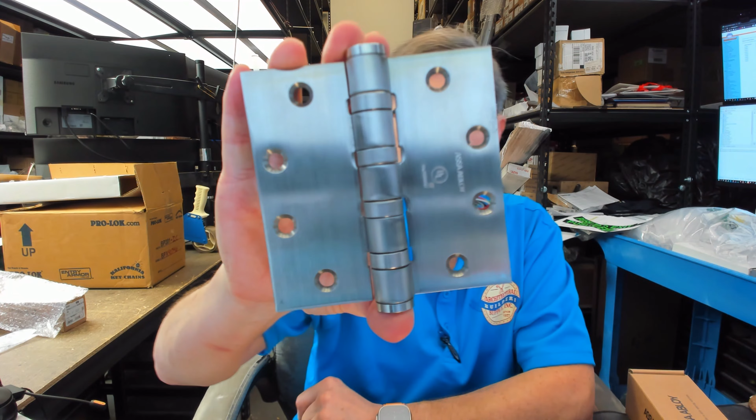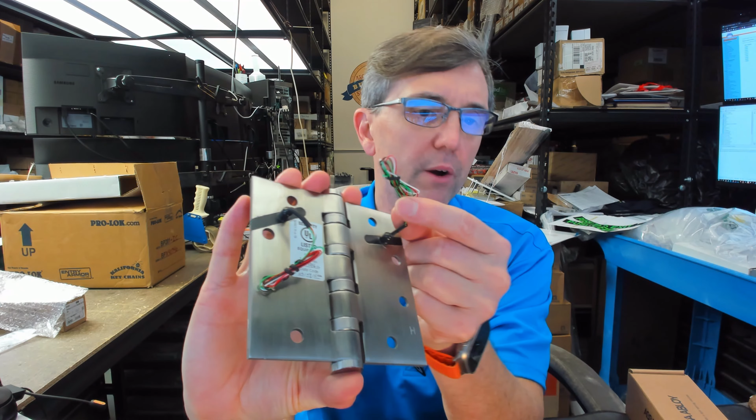Looks like a typical hinge, that's for sure. T4A3386, except this is a CC4. So this is a 4-wire hinge. CC would just give you bare wires on the back, and that's what this is. If you ordered a QC, it would have a quick connect, which works in the rest of the ASSA ABLOY QC ecosystem, whether it be exit devices, obviously, that you're going to connect to. You're going to be able to have a connector and run that wire back up to access control, your power supply, etc.

Bare wires are one thing, not really a big deal, but the QC is most commonly where I see new projects specified. They want the connectors already attached. Exit device goes on, connector, wires coming out of that with a connector to the connector on the hinge, obviously connector to the auxiliary cable going up to the power supply or whatever it might be, other components, other loads and switches.

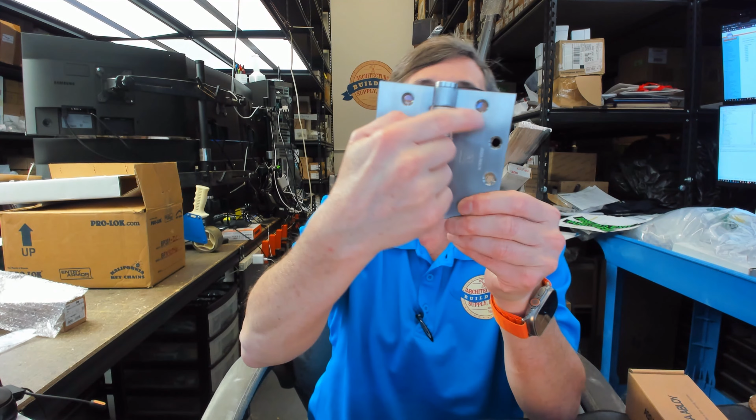CC4 is how this was specified. What's happening on this opening, I think it's just electric latch retraction. So it's just power is all that is on the opening where this hinge is going to. Looks like McKinney has an interesting way of machining the back side of the hinge to get those wires in there. Hinges like this are completely non-serviceable. You can't drive the pin out because those wires are literally going through the hinge.

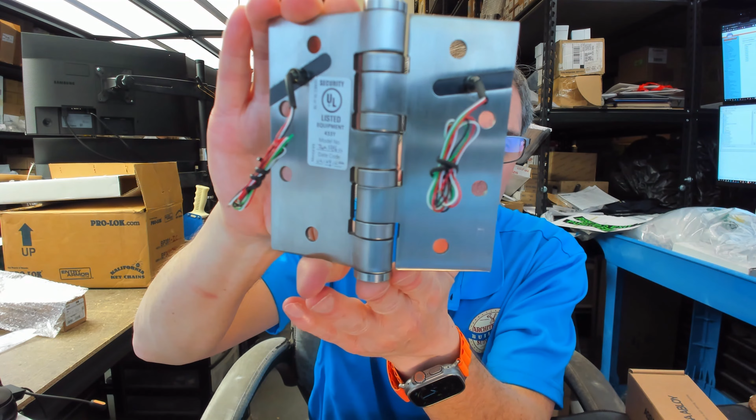In some way. It's not evident to me how that wiring is being done. Maybe up here, down here, and then here could be how that's done. That might be it. Very nice clean look on the hinge, that's for sure. A UL label on the back. It's also important to know that this hinge would be considered non-load bearing, so you would never put this in the top position of your installation. Let's see if we can get the camera to focus on that a little bit better. Okay. Anyway, there you go.

This is a T4A3386. Let's dissect that part number, but first it's a 4.5. That means that it is a 4.5-inch tall hinge and a 4.5-inch wide hinge. This is a T4A, which means that it is a heavyweight. And when we pull out the caliper, this should measure 0.180. My caliper tells me it's 0.176. Yeah, 176, and that's certainly within tolerance.

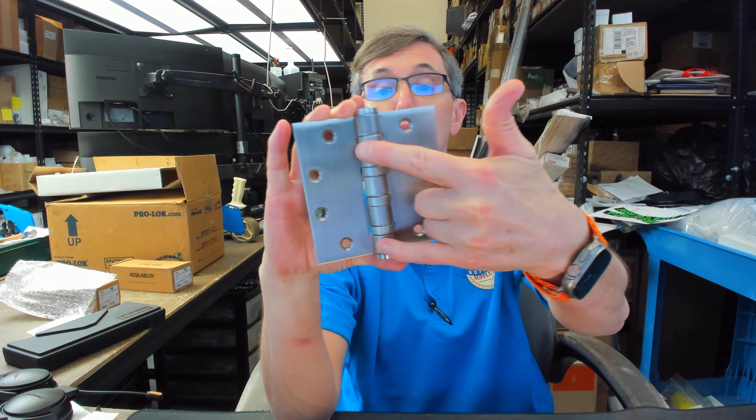This is a heavyweight hinge, and the tip-off immediately when you look at this is that it has 4 bearing packets, actually 4 oil impregnated packets. That 4 of them versus 2 means it's heavyweight. So where are you going to use this hinge? Let's talk about that right now.

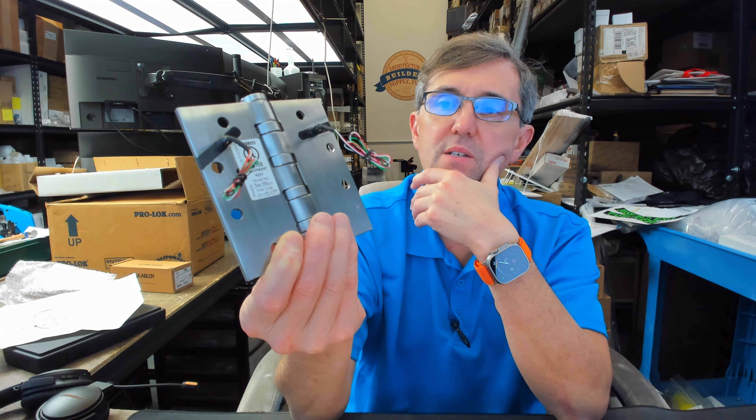So obviously some sort of requirement to permit low voltage current to pass from the securing area or some part of the door through the hinge back to access control, incoming power, things of that nature. So that's job one of this hinge. Why it's a T4A3386 is certainly because of the requirements of the mechanical portion of what's being done, not the electrified portion.

T4A3386 in no particular order means several things. It means it's a 5-knuckle hinge. You can see that. T4A means it's heavyweight. We talked about that earlier. 3386 means a couple of things. First of all, it's meant specifically for a square edge door and non-ferrous. So this is a 32D or a 630 finish. That means solid stainless steel with nothing other than a brushed finish.

So the fact that it's 4.5 by 4.5 tells me that it's likely an exterior door that is maybe heavier than standard, might be a 16 gauge door, and standard volume cycles over the door. And yes, you're doing some sort of access control on it. You might have the ability to unlock the exterior trim to be able to come in, that sort of thing.

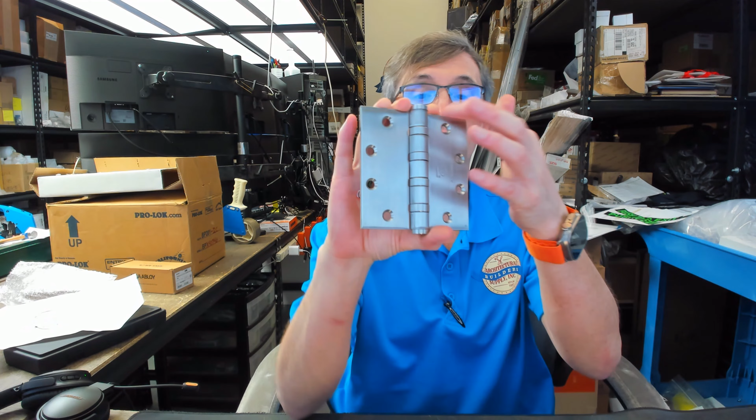So again, door thickness minus backset times 2 plus inset plus clearance. The last thing that you need to know is you always round up to the next widest hinge that's available. If the answer was just 3 1/16, which it was, this would be a 4.5 by 4, because 4 is the next available size, and that would be the right size. 4.5 by 4.5 may not have been the right size for this.

That's what was specified. It was brought to the architect's attention in the submittals that 4-inch would be a better choice. They elected to stick with 4.5 by 4.5. Okay, it's not best practice. You do want that vertical axis of pivoting brought as close to the face of the door as possible in all instances so that the function of the opening has been achieved, and you want to do that as elegantly as possible. This is going to include fasteners.

That's the TMS portion of the part number, but what's interesting is TMS means template machine screw. If we pulled up this industry standard document, we're going to find TMS. TMS is specifically going to mean template with machine screws.

So what that actually means is that you're going to take a machine screw and you're going to install it into a door and a frame that has been drilled and tapped for that. TMS means that you're going to literally go into tapped threaded holes.

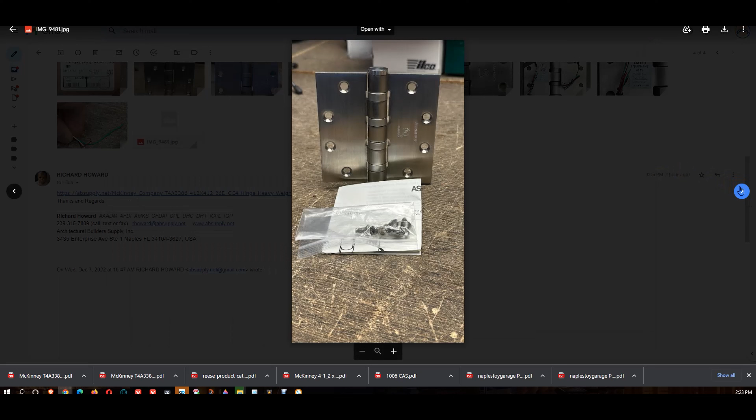Okay, here's the hinge that we are looking at. Let's take a look at some photographs that we have. There's the label, T4A3386, 4.5, 4.5, 32D or 630, CC4, TMS. The hinge itself. Nice and clean look on the front of it.

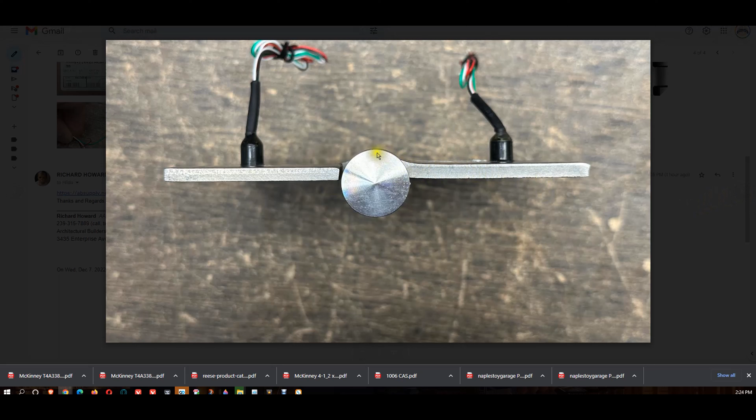This is a cross section that would show us what the swage or the bend on the hinge leaf looks like. That tells us that this is a full mortise hinge. Well, it tells us that it's a full mortise hinge for a square edge door, and I'll show you what that means in a moment. Close-up view of half of the hinge.

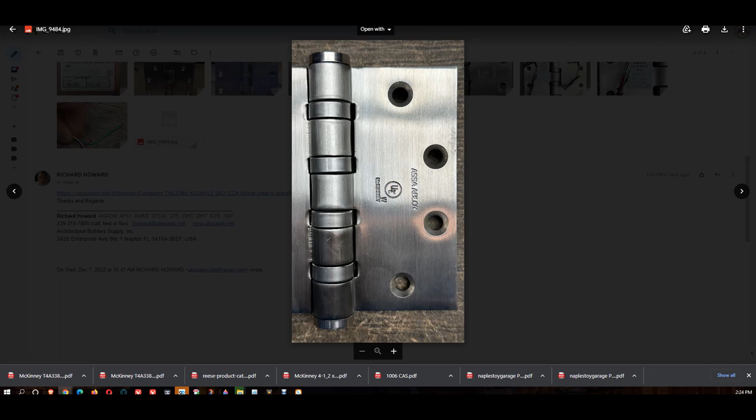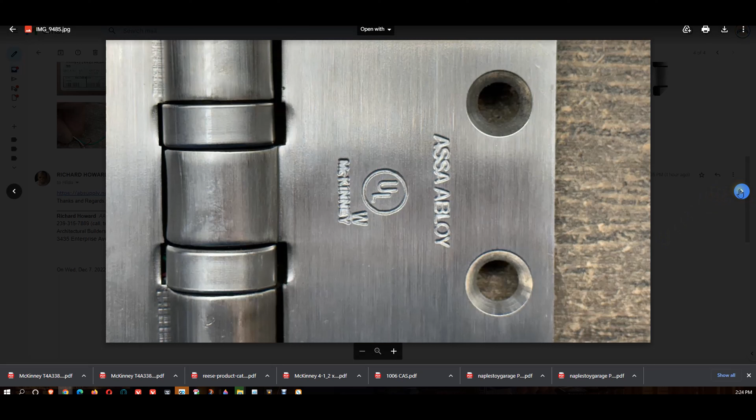That UL label is not mandatory on fire-rated doors to be on the hinge. All other hardware on a fire door needs to be labeled. Hinges don't have to be, as long as they're compliant. Non-ferrous base material and ball bearing. Close-up view of that finish and the manufacturer's logo. I don't know what the W means. Admittedly, that's a mystery. Currently.

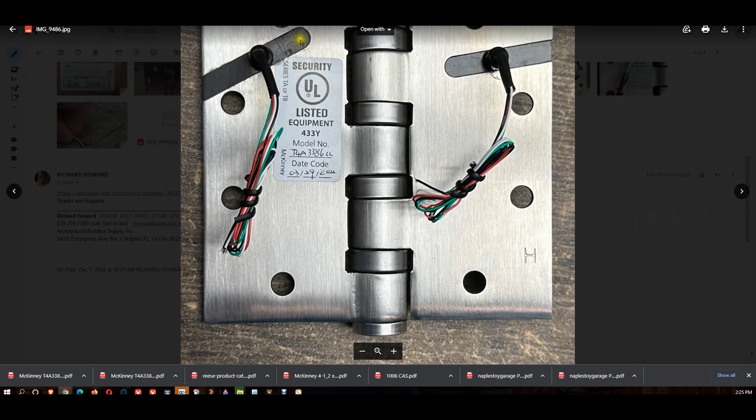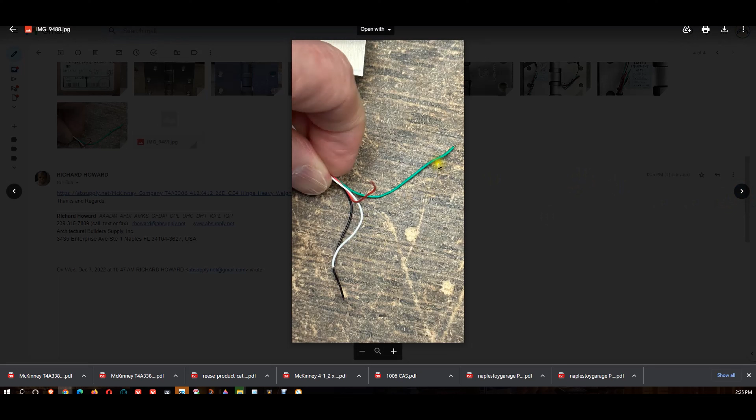The back side of the hinge. I would imagine some milling machine comes through and does that preparation after the fact. They may drill holes. I don't know. At some point I'll ask the factory how they race the wires through there. Showing half the leaf. Green, red, black, white, and green is what they've got here. Showing the 4 wires, those Torx machine screws along with the installation instructions.

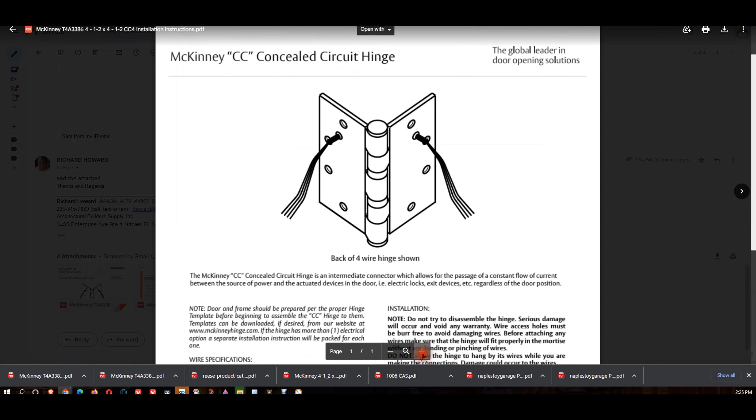Now, supporting documents. This document is actually included with the hardware. McKinney CC concealed circuit hinge. Just a power transfer hinge is what it is. It's a low voltage transfer hinge. There are air transfer hinges as well, when you need to have hardware that's not mechanical and is not electrical at all. There are applications that are in areas that can have no potential for voltage at all, and compressed air is used in those cases.

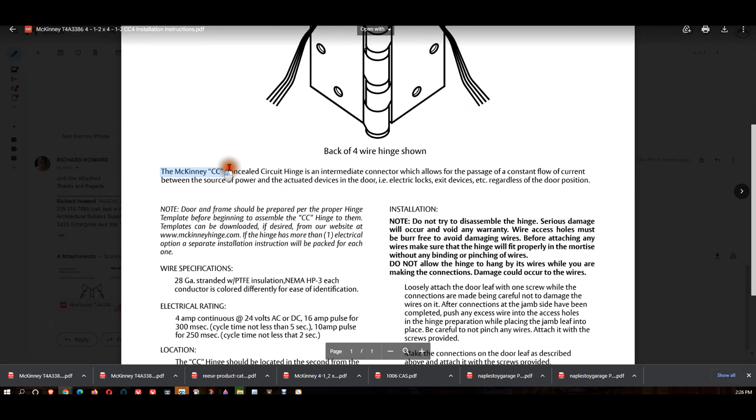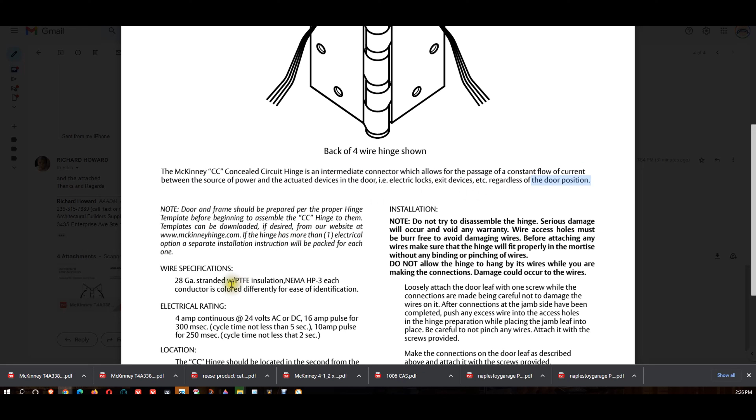The McKinney CC concealed circuit hinge is an intermediate connector which allows for the passage of a constant flow of current between the power source and the actuated devices in the door, such as electric strikes, locks, exit devices, regardless of door position. The door and frame are to be prepared for a standard hinge, and then when we look at the template, you'll see where that preparation needs to be made in the hinge reinforcing plate for the leaves that go to the door and the frame.

28 gauge wire, and the gauge of the wire is extremely important because you have to make sure that the conductor is going to handle the current that you're going to pass through it. Not so much the voltage as much as the amperage that's going to go through it. And to that end, they literally tell you the electrical rating is 4 amps continuous at 24 volts AC or DC. This hinge will handle 16 amp pulse for 300 milliseconds.

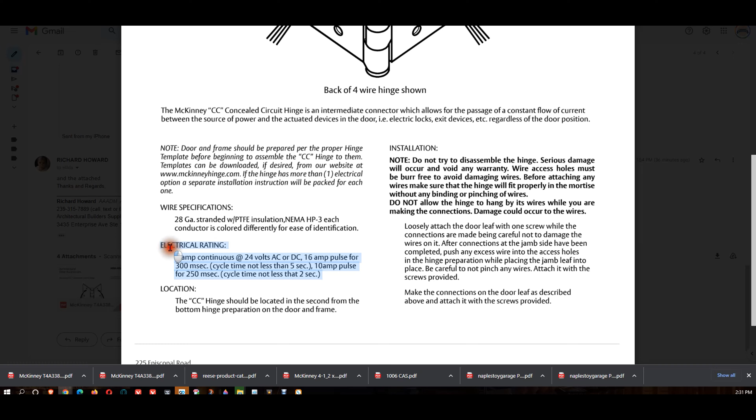Cycle time not less than 5 seconds. 10 amp pulse for 250 milliseconds. Cycle time not less than 2 seconds. Really important, otherwise you don't have thick enough wires is the bottom line. The CC hinge should be located in the second from the bottom hinge preparation on the door and frame. Do not try to disassemble the hinge. Serious damage will occur and void the warranty.

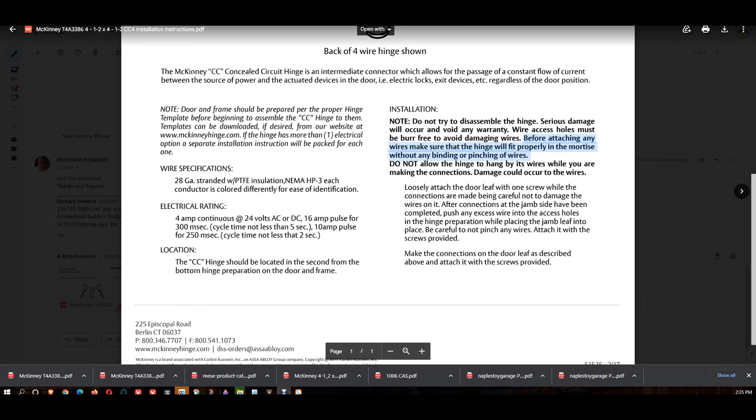We talked about that. Before attaching any wires, make sure that the hinge will fit properly in the mortise without binding or pinching of wires, etc. The method of attaching this material is a little bit different in the sense that you can't split the hinge leaves. Loosely attach the door leaf with one screw while the connections are made, being careful not to damage the wires on it.

After connections at the jamb side have been completed, push excess wire into the access holes in the hinge preparation while placing the jamb leaf into place. Don't pinch or cut any wires. Make the connections on the door leaf as described above and attach with screws. Let's look at the next document. This is a cut sheet on the CC option.

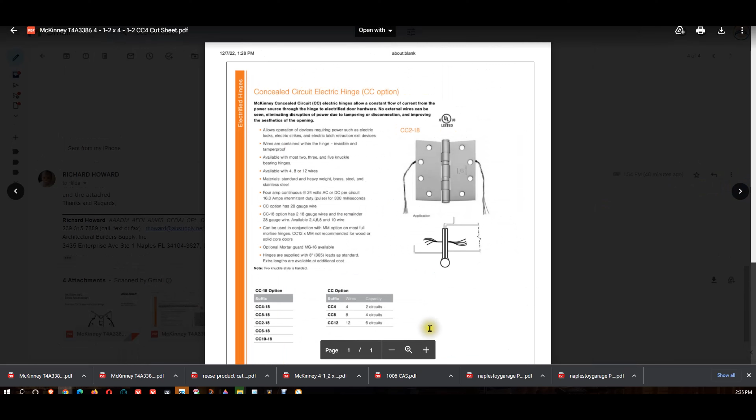So this is going to talk about the fact that this is a power transfer hinge, an overview of it, available with most 2, 3, and 5 knuckle hinges, 4, 8, or 12 wires. Standard and heavyweight. You can do these out of brass, steel, and stainless. The electrical profile is available here. The CC option has 28 gauge wires.

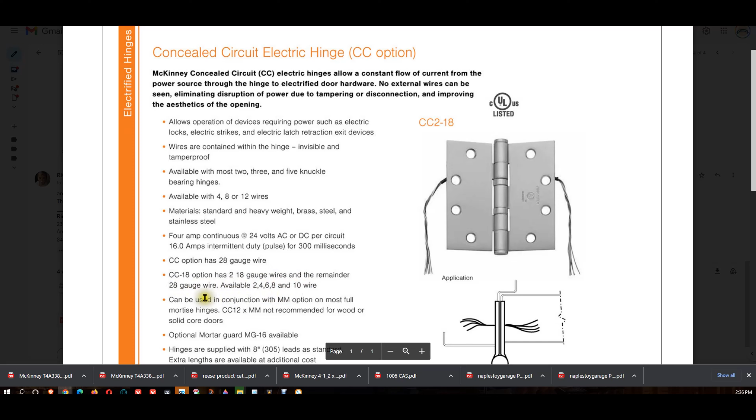Well, it turns out that there are certain applications where you need to run more amperage through a hinge than necessary. Well, they have the CC-18 that will give you 2 18 gauge wires, and then the others, however many wires you order, will be 28 gauge. So you'll get one pair of 18 gauge wire. Can be used in conjunction with the MM option, which is a monitoring option to know if that hinge is in the open or closed position.

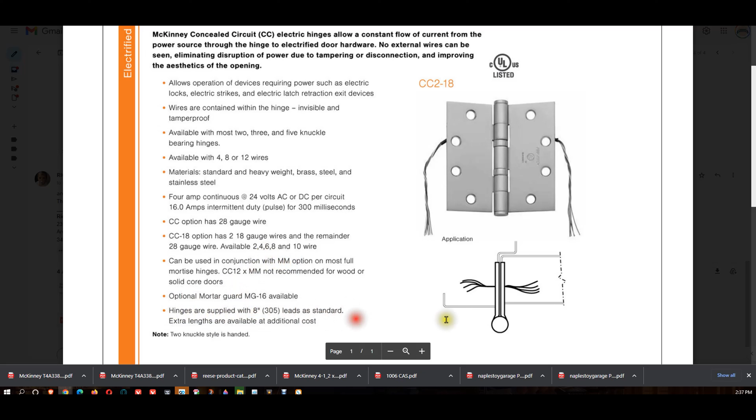Mortar guards. 8-inch leads are standard on these hinges, meaning the length of the wires is 8 inches. You can do extra lengths, and you can do the QC as well, but this is the CC. So really informational page here for you. 4, 8, with the 18 option. 2, 6, and 10. I'm not sure why they put that out of sequence. Maybe just for what's common. 4 wire, 8 wire is common.

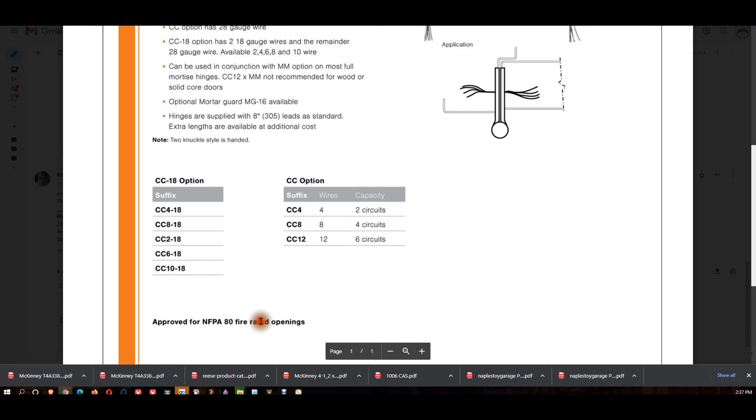4, 8, and 12 when you've got just 28 gauge wires. They can't do a 12 on a dash 18 because they don't have enough room to run that extra pair of wires through there. Approved on fire rated doors according to NFPA 80. This is the T4A3386 cut sheet. So this is the hinge itself.

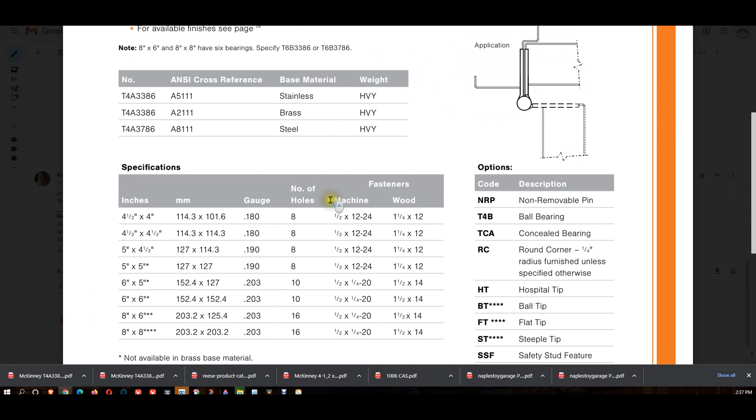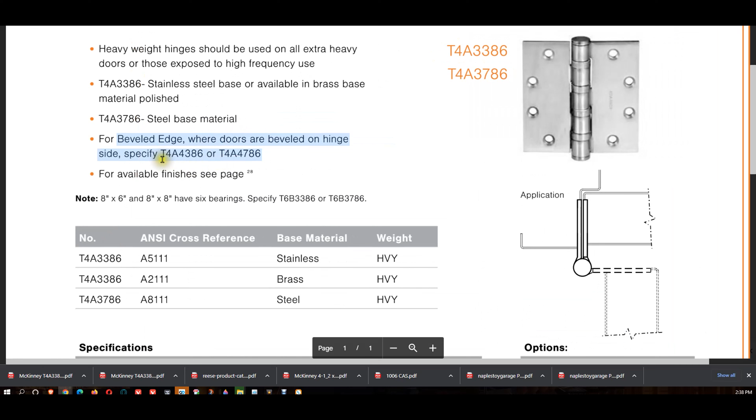Now I had talked about the square edge. This is literally for a square edge door. If you have a beveled edge door, you're going to use the T4A4386 because the bend on the hinge leaf here needs to be different. The swage, the bend right here would be different if it's a beveled edge door, in the sense that rather than bending that leaf to achieve basically 0 degrees, it would be bent further so that it's skewed back at the 3 degree bevel. That would be pretty typical.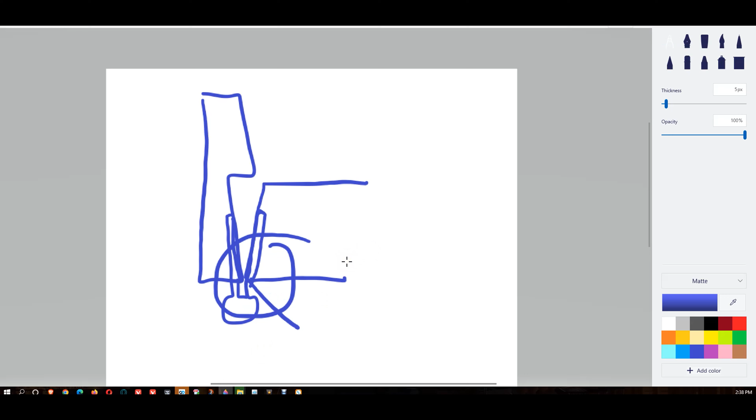Actually, I have a drawing here of it. So this is going to need to get bent more when you need that leaf to go off in that sort of scenario, rather than just square. This is going to need to be bent back a little bit. That's what we're trying to draw there.

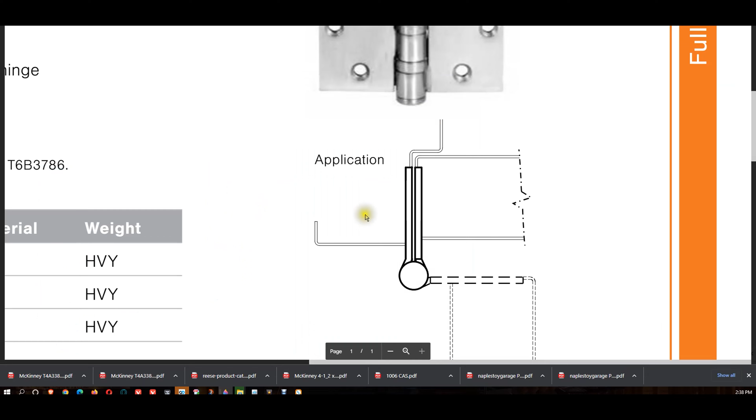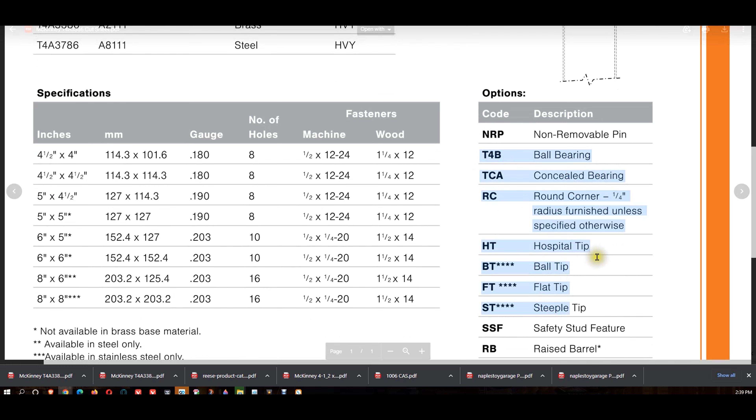Options when it comes to the base hinge are listed here. Because this is a power transfer hinge, some of it won't apply. You can get a radius corner. Decorative tips, I don't think you're going to get on a power transfer hinge. Hospital tip, you won't either. Magnetic monitoring you can do. Basically 2 buried magnets that act as a single pole, single throw type switch. Well, actually a single pole, double throw switch.

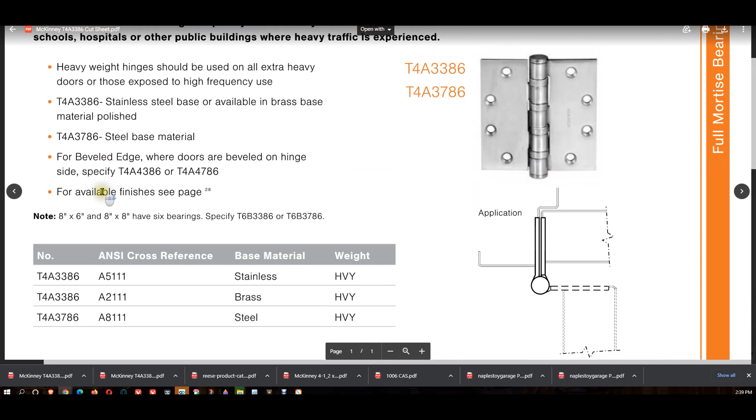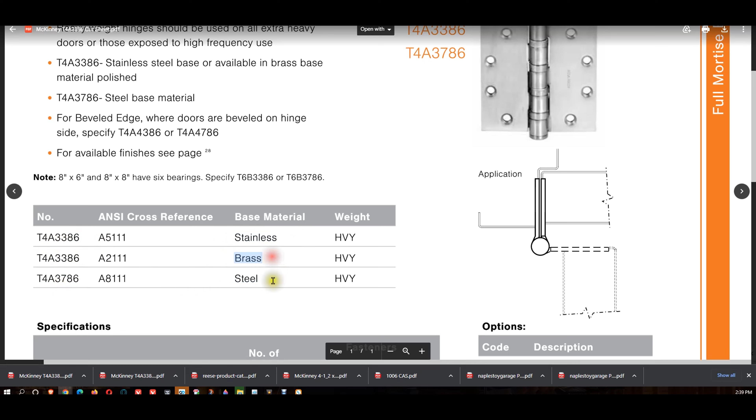3 and 7 stainless. Pardon me. 7 is ferrous based and 3 is non-ferrous based. Last document. This is going to be the template for the hinge. This shows you where to drill the holes for the CC option.

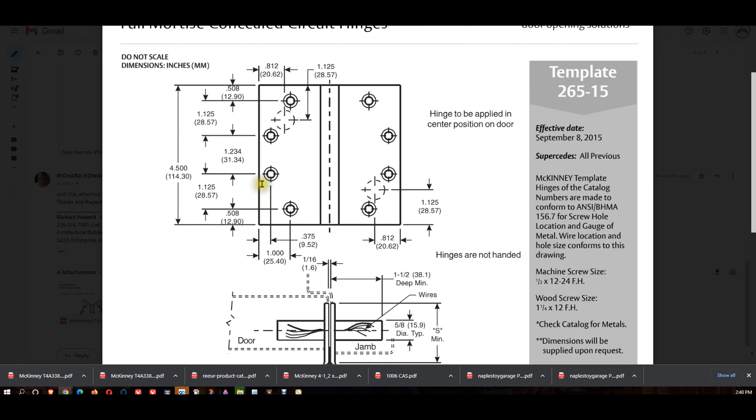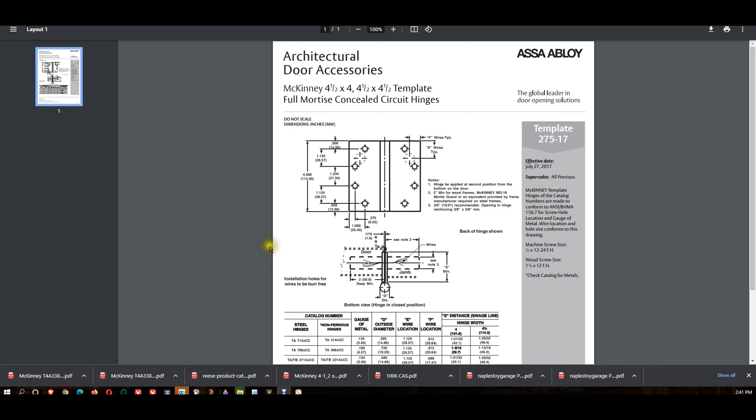I don't think this is the right document. Let's take a closer look. Yeah, it was not the right document. This is the proper document for this. And what tipped me off on that was the fact that the holes were not in the right location for the wires to come through. So this is going to give you the location not only of the screw holes, but where you'll need to prep for the wire raceway to go through.

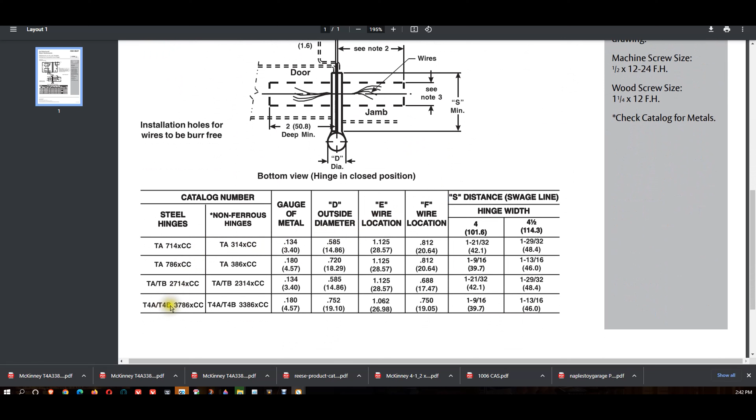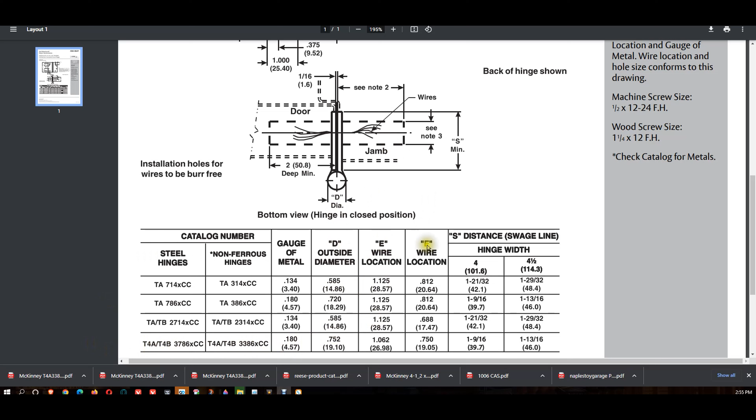At the F dimension and the E dimension, probably going to be related to the size of the hinge. We would be down here. Okay, so we've got the T4A3386 CC. Gives you your E and F dimensions, 1 1/16 and 3/4 inch. Your hollow metal manufacturer, your wood door manufacturer would need to see this so that they can drill those holes.

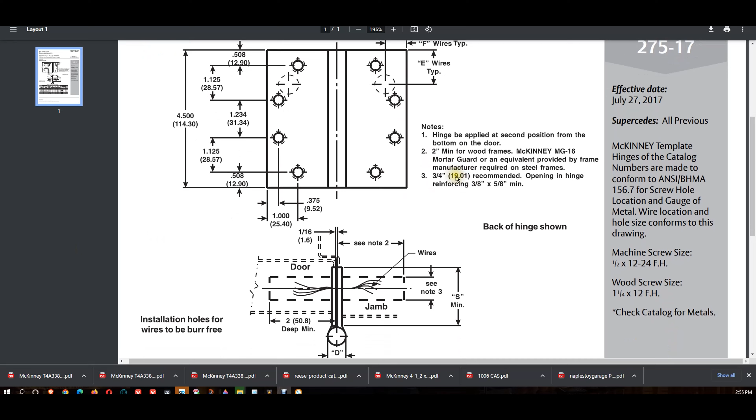Obviously, whatever the door is, you'll need a raceway. So that information is really important. You won't just run low voltage wires through the door. There would be a raceway. Additional information important on here. You're going to most absolutely want to review everything. The swage line is important to know at some point, that dimension.

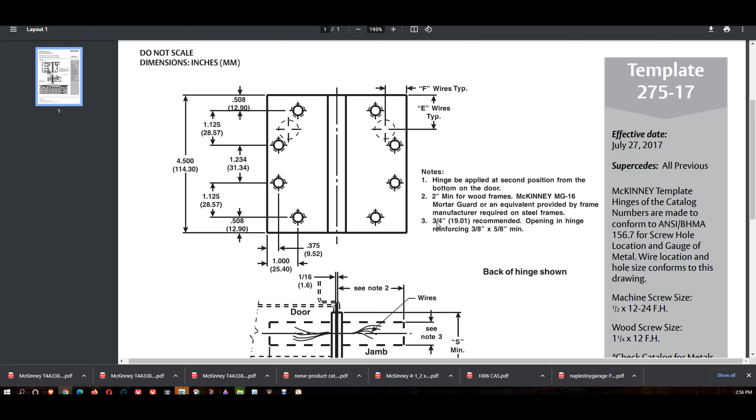And then we've got dimension, note 3. 3/4 inch recommended, opening in hinge reinforcing, 3/8 by 5/8 minimum. Note 3. Diameter of the hole, 3/4 inch recommended. I have to admit, I'm not really sure what they're referring to. 3/8 by 5/8 minimum.

See note 2. 2-inch minimum for wood frames. You got a mortar guard provided by frame manufacturer, required on steel frames. When they say required, that means your steel frames must shield the low voltage wires from mortar making direct contact with those wires. 2-inch deep minimum.

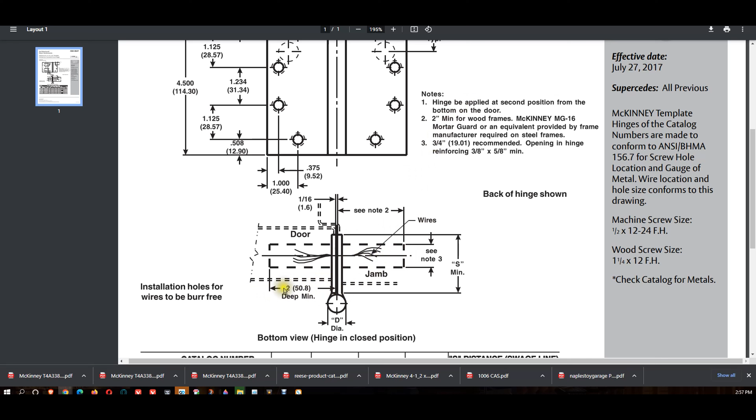I would just see this as a 3/4 inch diameter hole drilled in the proper location. Opening in hinge reinforcing, what they might be saying is you need a minimum of 3/8 by 5/8. I only have ever seen round holes in those plates. And this document covers different hinge part numbers as well.